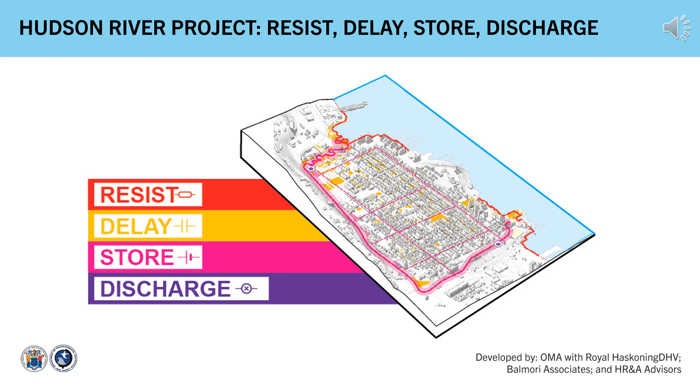It was developed as a comprehensive approach to secure a resilient future for the neighborhoods of Hoboken and parts of Jersey City and Weehawken in Hudson County. This critical piece of infrastructure will help protect our communities from the next storm surge along the Hudson River.

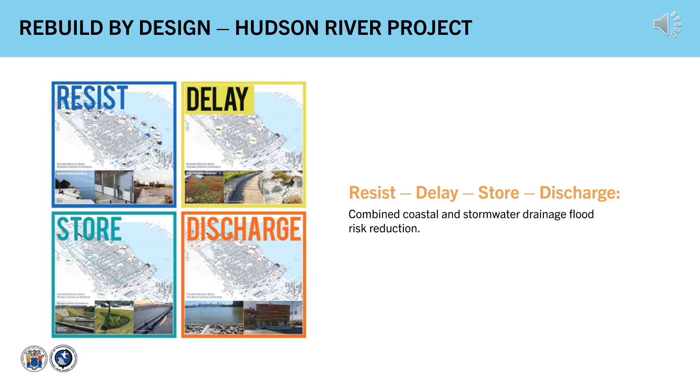The resist, delay, store, and discharge strategy proposed as part of the competition was then further developed during a feasibility and environmental impact statement process. Our project focuses on the resist part of this project. The project will be installing a flood wall with floodgates and integrating a resiliency park, along with other urban amenities. The project is happening now and through the summer of 2027.

The project area consists of the northern and southern alignments on northern Hoboken and southern Weehawken. We are on 13th Street and Washington Street to Lincoln Harbor Road. On southern Hoboken and northern Jersey City, we are on Hoboken Avenue and Coles Street to Newark Street and Washington Street.

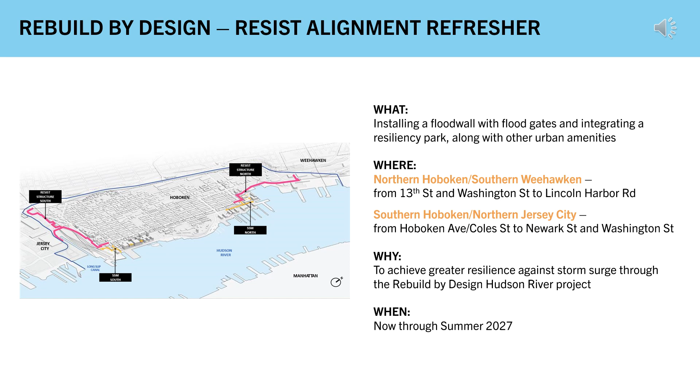How was the resist strategy that we're currently implementing developed? We looked at the project area that was defined by the original competition proposal that includes parts of Jersey City, Weehawken, and the entirety of Hoboken. We looked at the flood plain in the area, and we looked at the breach points with the flood waters of the Hudson River entering the project area.

We can see that the flooding enters the area through the New Jersey Transit Rail Yard and the cove at Harborside Park. The waters then flood other low-lying areas. To stop the flow of the floodwaters throughout the area, a resist alignment was developed to stop the water at these locations to prevent flooding in other low-lying areas in the back of Hoboken and the rest of the project area.

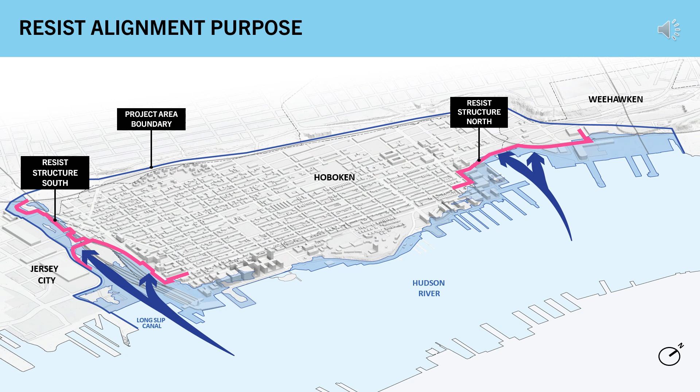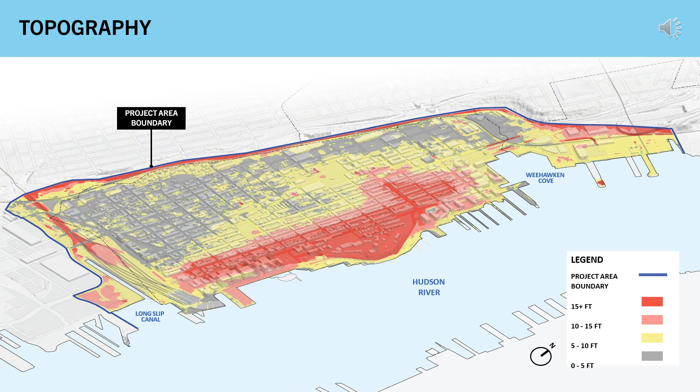The reason that the resist structure doesn't run the length of the project area is due to the natural topography of Hoboken. The center portion of eastern Hoboken along the Hudson River is at a much higher elevation. This allows the project to only construct 2 separate components, a northern and southern alignment. Using the 2 alignments and the natural topography, the project is going to complete the line of protection to an elevation of 15.5 feet above sea level.

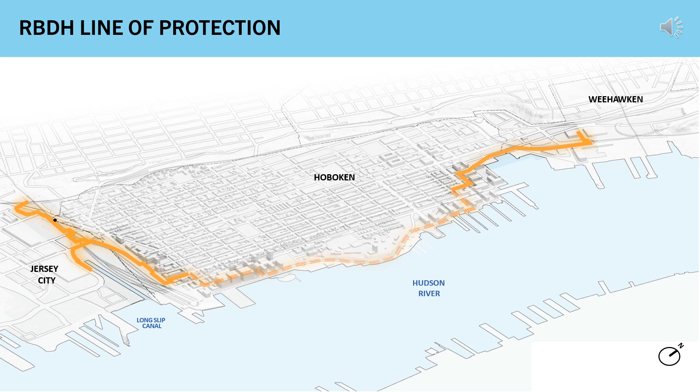This includes protection from the 1% or the 100-year storm flood elevation, with an additional foot of freeboard to prevent overtopping of the wall during wave events, and then an additional 2.3 feet of height, anticipating sea level rise of 2.3 feet by 2075.

The full design of the resist structure includes the northern and southern resist components as well as a sewer system modification that we can see in yellow on this slide. This modification was completed in 2022. It is all underground and it involves separating the sewer piping from the stormwater drainage system. This was done so that any flooding from a coastal surge event will not be able to go under the resist structure itself through the combined sewer and stormwater system that was previously in place.

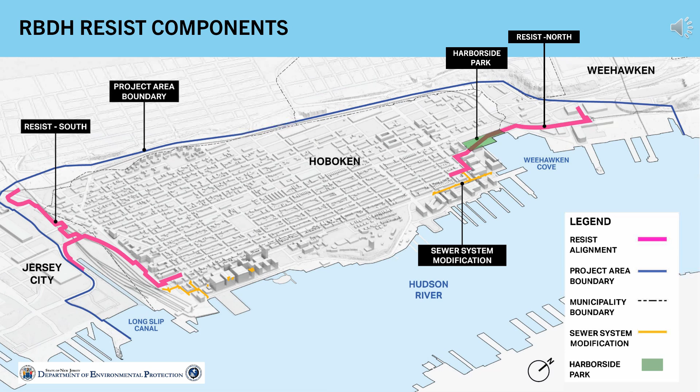It also prevents water from reaching the North Hudson Sewerage Authority treatment facility during a surge event. As an additional benefit, the separation prevents stormwater from entering the treatment plant during rainwater events. The project is currently constructing the remainder of the resist structure, which includes the physical barriers and gates that will resist the next coastal storm surge event.

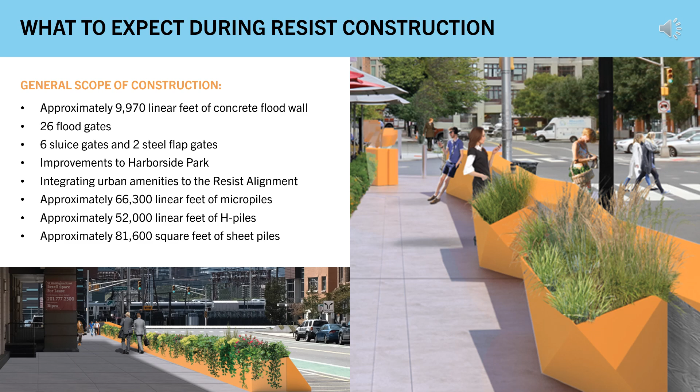On the alignment, you see two different colors, a cyan color that depicts the resist structure and a red color that shows the various gates that will be constructed. In addition, you can see numbers that illustrate the approximate wall heights in those various areas.

Working left to right of the slide, the resist structure will tie into the New Jersey Transit Rail embankment and then wrap around HBLR. It'll cross Jersey Avenue and tie back into New Jersey Transit HBLR embankment. There will be a gate and structures that tie into the embankment on Grove Street and on Marin Boulevard. The resist structure will end in the embankment across Marin and proceed through the New Jersey Transit Yard.

Then it will proceed along Observer Highway and it will cross Observer by Washington Street and head up Washington to terminate just prior to Newark Street. There are two additional sections in Jersey City located along 18th Street and Marin that will also tie into New Jersey Transit HBLR embankment.

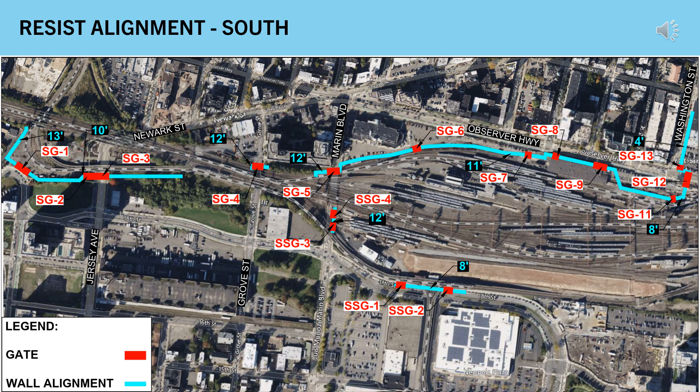On the north side, from left to right, the structure starts on Washington Street between 13 and 14. It will proceed past 14th Street and then turn up through the alley to Bloomfield. Then it will continue towards Garden, where the alignment then turns towards the park. The alignment will dissect Harborside Park and head towards Harbor Boulevard.

Once the alignment crosses Harbor Boulevard, it will turn and go along HBLR. It will cross the HBLR tracks and then continue to 19th Street. After crossing 19th Street, it runs along the HBLR line and turns west under the 19th Street parking ramp, ending in a parking area between the two buildings near JFK Boulevard East.

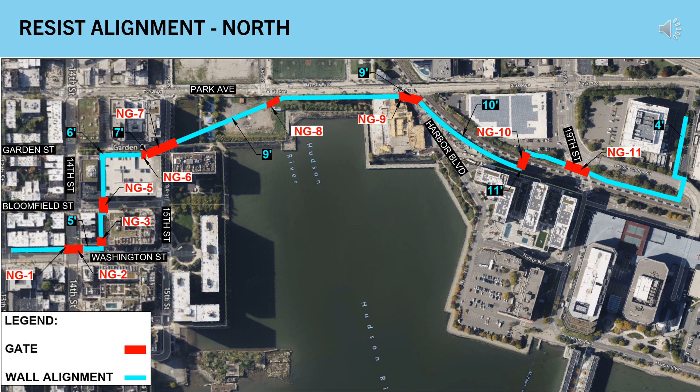There will be two different types of structures on this project. One will be a T-wall, which is shown on the top left of the slide for higher wall heights, and an L or an I-wall type configuration shown on the left side of the slide for shorter sections. There will also be multiple gate types installed as a part of this project. The slide also illustrates these types of gates.

So the first type is a rolling gate. These gates will roll on a track when moved into a closed position. The second type, shown in the middle, is a swing gate that closes just like a door. The last type is a stop log, which will be stored nearby and will be slid into place when needed. These stop logs are generally intended for smaller openings.

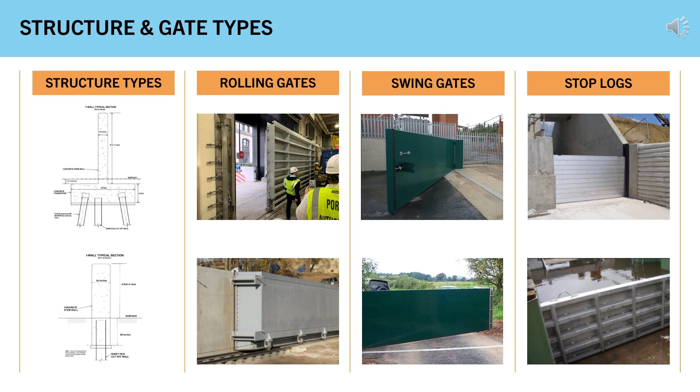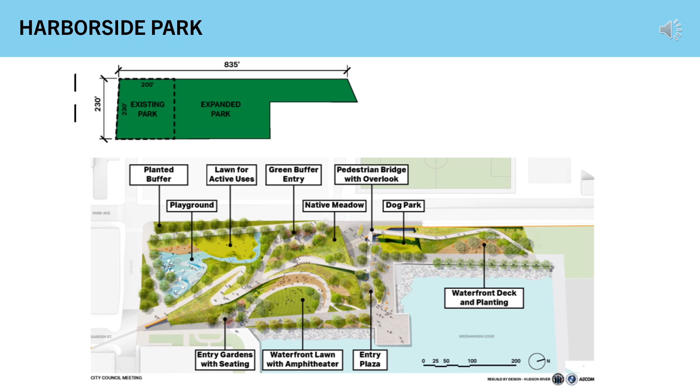Improvements to Harborside Park will be made. The top illustration shows the pre-construction park area with expanded park area once the park is complete. The rendering on the bottom highlights some of the features that will be a part of the improved Harborside Park. The resist structure will underlie this park and create an elevated section across the eventual park.

Here you can see the typical construction sequence as this project progresses. Test pitting. The purpose of the test pits is to investigate and confirm locations of underground utilities prior to the start of the construction in applicable areas. Really, what it's intended to do is minimize potential delays and impacts during construction.

Another early construction activity includes installing piles and sheeting. Once this step is done, the contractor excavates and installs the foundation for the resist structure. The right photo illustrates the rebar, which will subsequently be filled with concrete for the foundation.

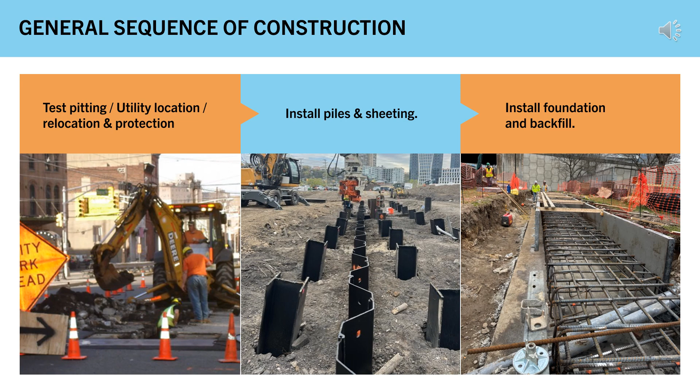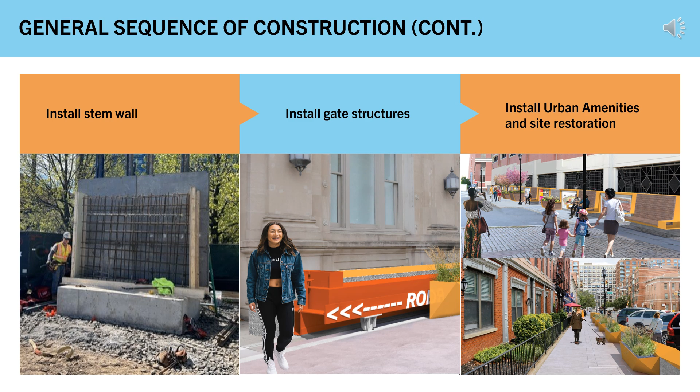Once the foundation is set, then the structural stem wall will be installed. On the left, you can see a sample of the stem wall after the walls get constructed. Then the gates will be delivered and installed. And then the final step will be the urban amenities, restoring landscaping, and site restoration.